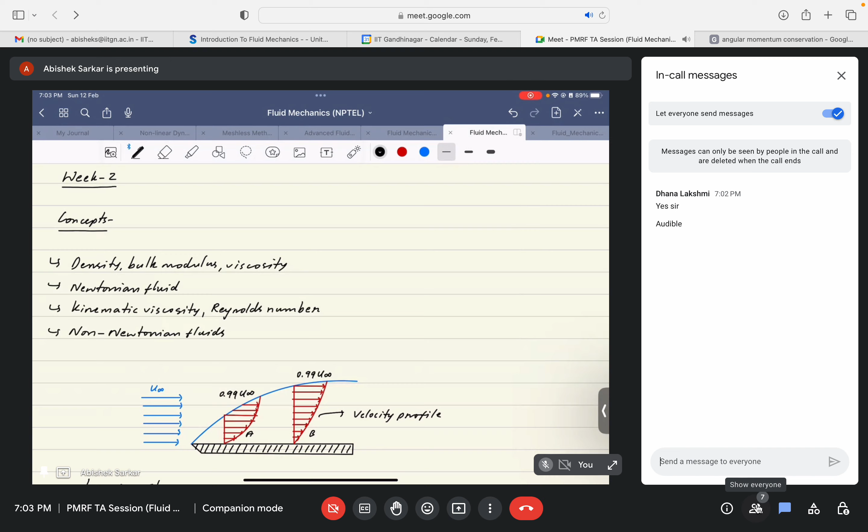So, based on the content of the course that I have seen, I guess these are the topics that have been taught: density, bulk modulus, viscosity, then Newtonian fluid, kinematic viscosity, and also non-Newtonian fluids. So, among all of you, do you have any doubts regarding these concepts? You can ask if you have any doubt. So you're free to ask.

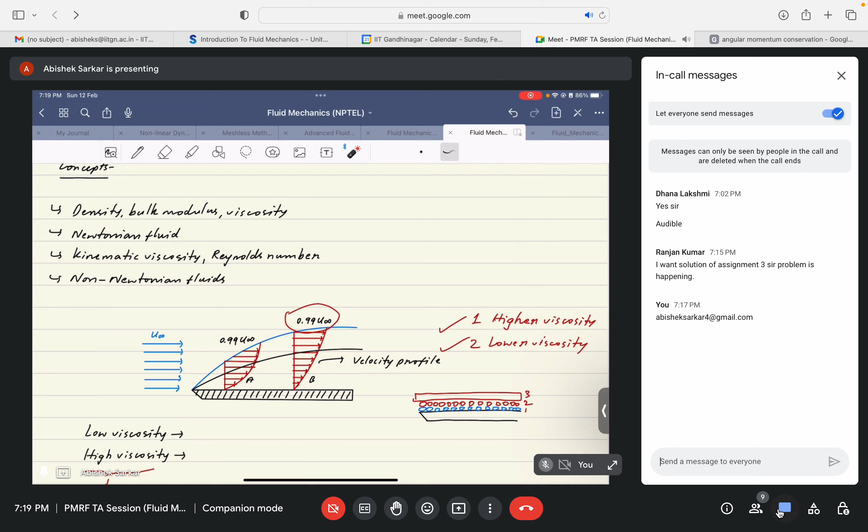I guess Professor Chakraborty took a long time to teach you the concept of how to choose the elemental volume. What are the conditions to choose the elemental volume to find out density? What is the concept behind choosing the elemental volume? The volume shouldn't be too small or too big. Yeah, absolutely right. Who is it?

Prasam. Oh yeah, Prasam, welcome back again. You're absolutely right. Why do you say that it shouldn't be too small? Because it may seem from a mathematical point of view that as the limit approaches 0, we get more accurate or fine solutions. But as you have pointed out correctly, we cannot choose it to be too small. Could you please explain to the class why it cannot be too small?

Because the error will be more, sir, if we apply the law of continuum mechanics. Yes, you're absolutely right. It's actually the continuum hypothesis. If the elemental volume is much lower compared to the mean free path of the fluid, there will be much more errors, much more oscillation, because there will be very few particles within the chosen volume, and that will not give a correct value of the density.

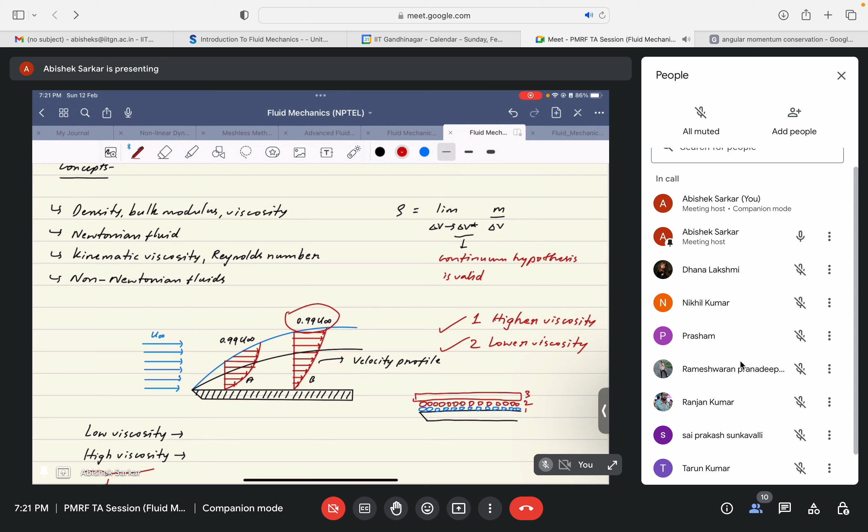Thank you, Prasam. So density is clear. I'll point it out again. Density can be given as the limit of delta V tending to delta V star of mass per unit volume, where delta V star represents the smallest elemental volume over which the continuum hypothesis is valid. If we go below that, the continuum hypothesis does not work, and that's why we get large errors while measuring the density.

So could any one of you tell me about the bulk modulus? What does bulk modulus actually mean, or what is its significance?

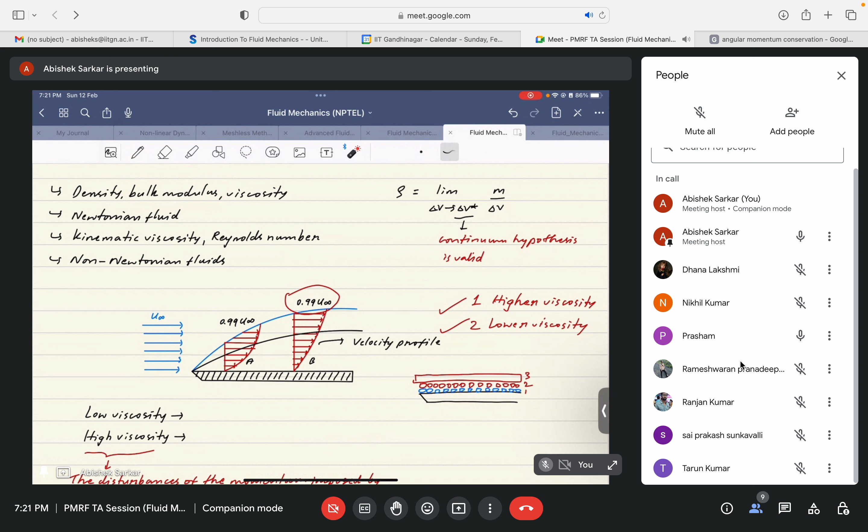Please, a basic mathematical definition is also fine. We'll just then try to understand the definition. So what's bulk modulus? Hello. Yes, Prasam. Sir, it is significant regarding whether the flow is compressible or incompressible. With respect to change in pressure, the relation between change in pressure to change in the volume or density. Yeah, thank you, Prasam.

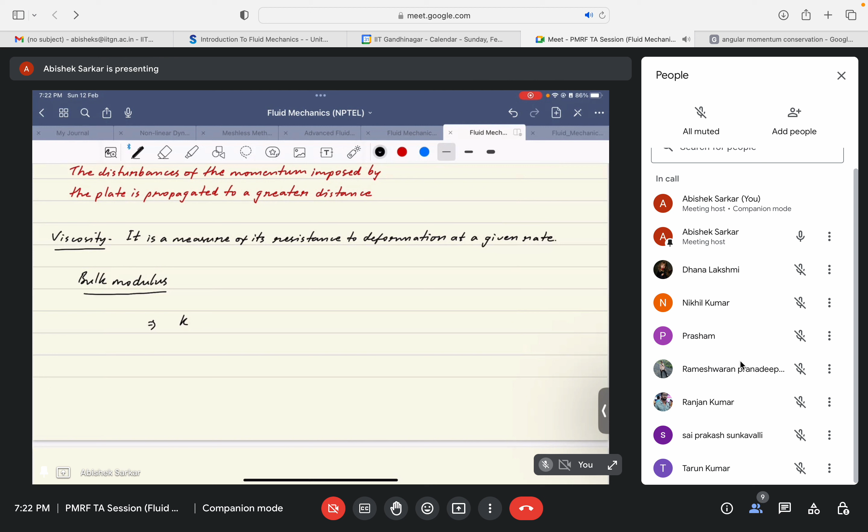It's absolutely correct. So, as he has rightly pointed out, it helps us to know whether the fluid is compressible or not. So the mathematical definition will be given by the change in pressure, applied pressure, divided by the change in volume over its original volume, or in other way, the change in pressure divided by the ratio of the change in density to its original density. So given this definition,

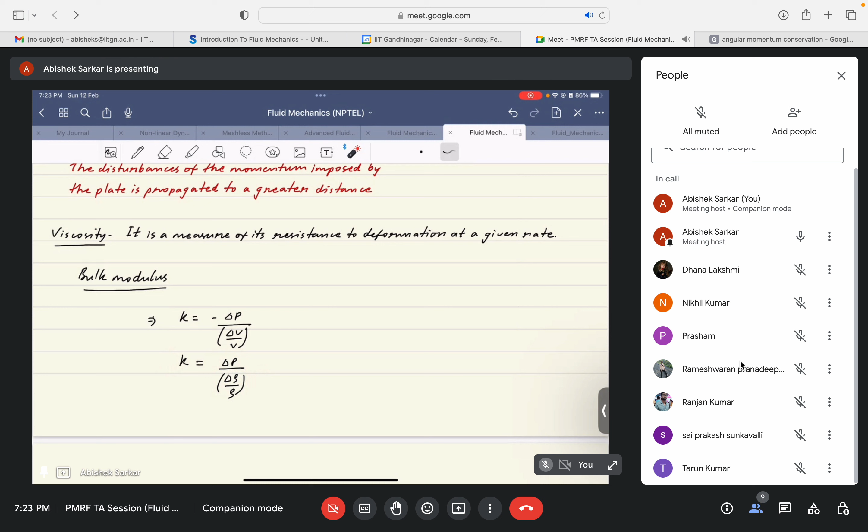as you pointed out that it helps us to know whether fluid is compressible or not, what would be the bulk modulus for a highly compressible fluid? Would it be low or high? Sir, low? Yes, it's correct, because for a given applied pressure and a given density, if the change in density is higher, then since the value in the denominator is larger, the value of K will go down. This is a very subtle concept, but thank you for pointing it out correctly.

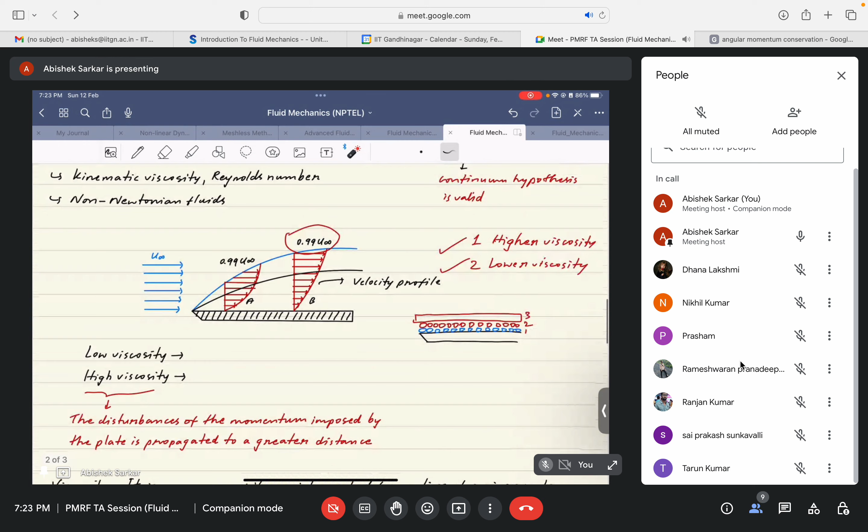Okay. So that's fine. So given you have pointed out compressible or incompressible fluids, can anyone please tell me about the parameter? Not bulk modulus. Bulk modulus is also one of the parameters, but the more famous parameter that we usually choose to differentiate between a compressible and incompressible flow. I guess it's a well-known non-dimensional number. So what is it? Could anyone please point out?

Mach number. Yeah, so thank you, Prasam. It's again correct. So Mach number is the well-known or standard measurement of telling whether a flow is compressible or not, and it's given by the ratio of the fluid velocity to its sonic speed. Sonic speed is basically the speed of sound in that medium, or in a simpler sense, the speed by which the disturbance propagates in that medium. Okay, so I guess it's clear.

Sonic speed, or speed of sound in that medium. That's also necessary. Speed of sound varies from medium to medium, whether it's air or water, so it's not a constant value. Okay, so that's again correct. So now we can, I guess, talk about Newtonian and non-Newtonian fluids.

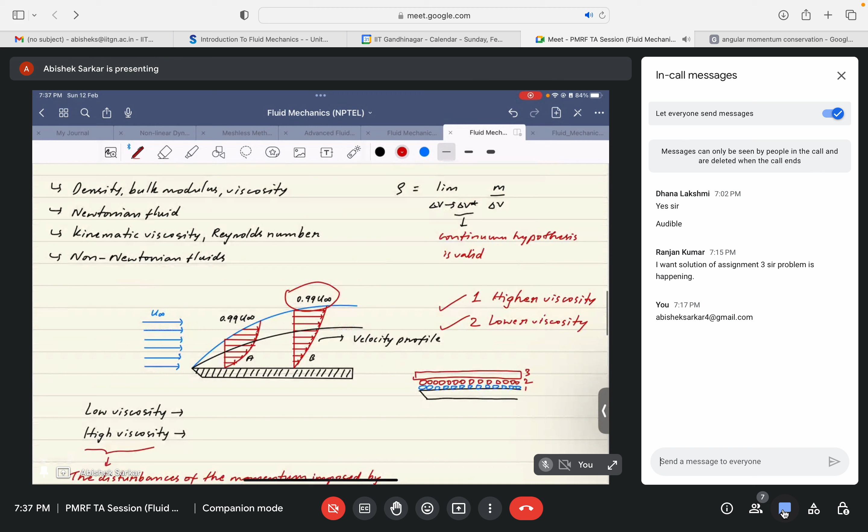That's why we follow these equations and formulate them in our momentum equations, or in this case stress-strain equations, to model our problems. That's the only reason we use them, but these are not universal laws. Okay, that's all I wanted to point out. Anything left? Yeah, kinematic viscosity and Reynolds number. So mu here that I have written is actually dynamic viscosity.

So given this, could anyone please tell me what kinematic viscosity is? Kinematic viscosity. So mu divided by rho. Yeah, thank you so much, Prasham. It's actually given by mu divided by rho. Yeah, so

what does it actually signify? Could you please tell what is the significance of kinematic viscosity? We know there is a dynamic viscosity that tells us about the resistance of the fluid to any motion through it, but why have we made efforts to define another viscosity, or make it more problematic for us by defining another parameter? Why are we defining kinematic viscosity? Could anyone please give just a vague explanation of what it signifies?

Sir, in kinematic viscosity, the mass is not there. I mean, it is not considered. In that unit, the mass is not there, kg is not there. Yeah, that's fine. That's also correct. I will not say 100% correct, but that's a very good approach to explain it in some sense. But in a simpler sense, or in a more accurate sense,

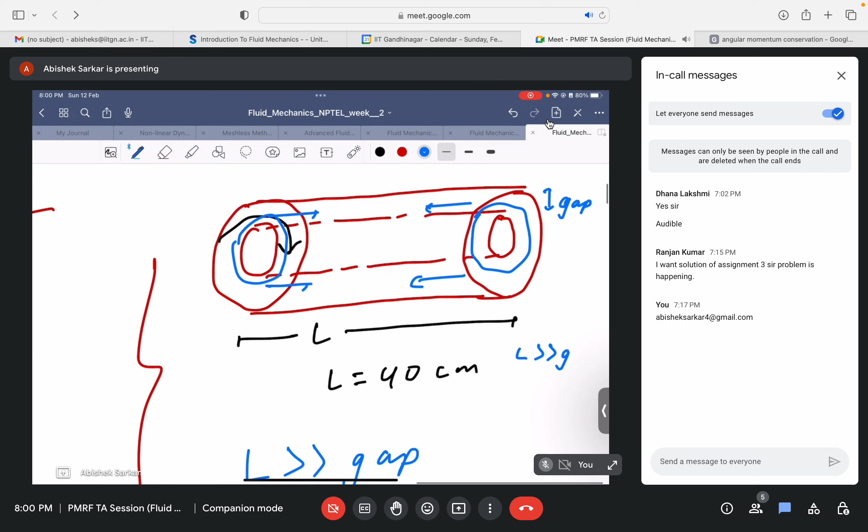So I guess it is clear when we can take these assumptions. It should not always be taken for granted that we can ignore the end effects. Even if in the exam you're told that we're ignoring the end effects, you should mention why. Why not include the end effects?

You can mention that we take the length of the cylinders to be much larger than the gap between the cylinders, and that's why we can comfortably assume that the fluid flow within this region is not affected by what's happening at its ends. Given this assumption, we can solve the fluid flow problem in this region. So I guess it's clear.

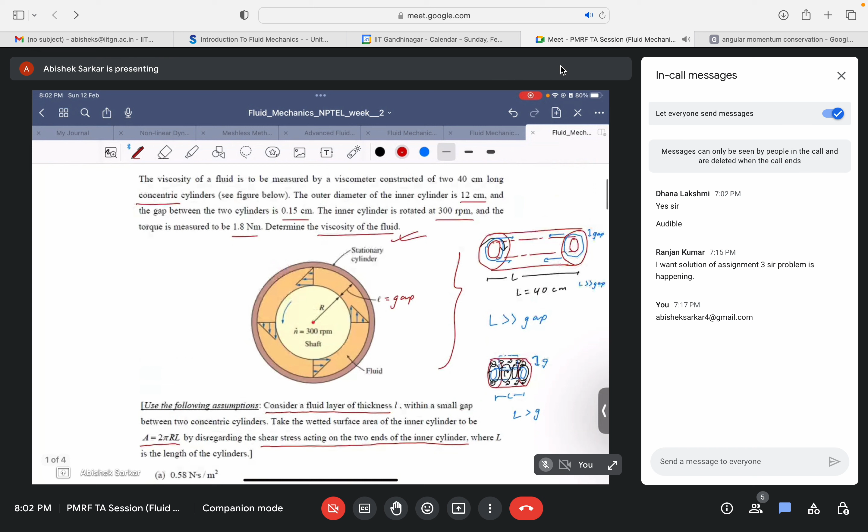So I'll try to solve it here, and draw the diagram again. Has anybody solved it? Sir, option D. Let me see, what is the option? 0.158. Okay, thank you, Prasham, I guess it is right. For the sake of all others, we'll try to solve it, and then take on other problems for others to solve.

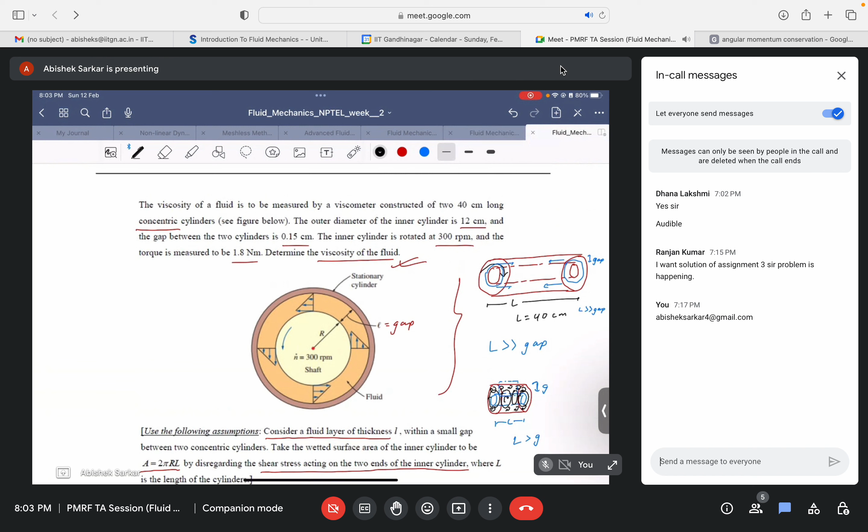So those who have not solved it or do not know how to approach, look at this illustration. Here it is given that the length of the cylinders is 40 centimeters. The outer diameter is not given, so that's fine. The diameter of the inner cylinder is given to be 12 centimeters.

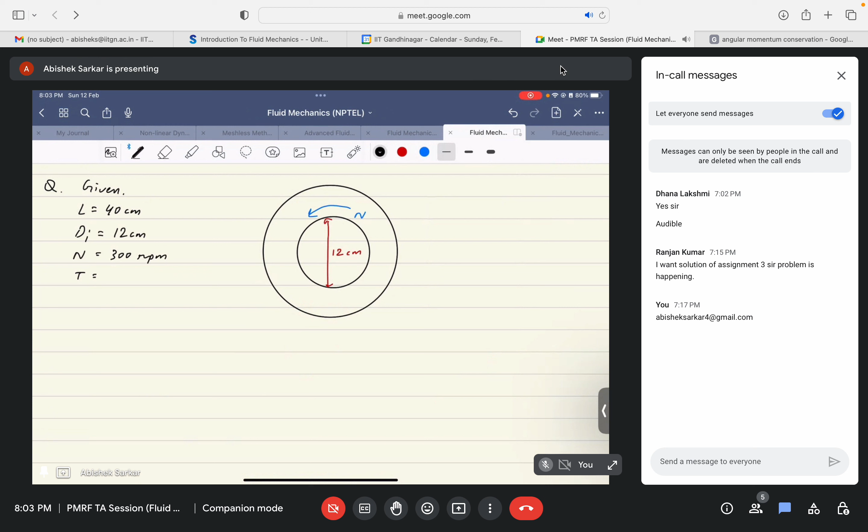The RPM, or the rate at which this inner cylinder rotates, is given to be equal to 300 RPM. RPM is basically revolutions per minute. And the torque, yeah, is anybody speaking? The torque is measured to be 1.8 Newton meter.

Dhana Lakshmi, are you speaking? Is there any doubt? Dhana Lakshmi?

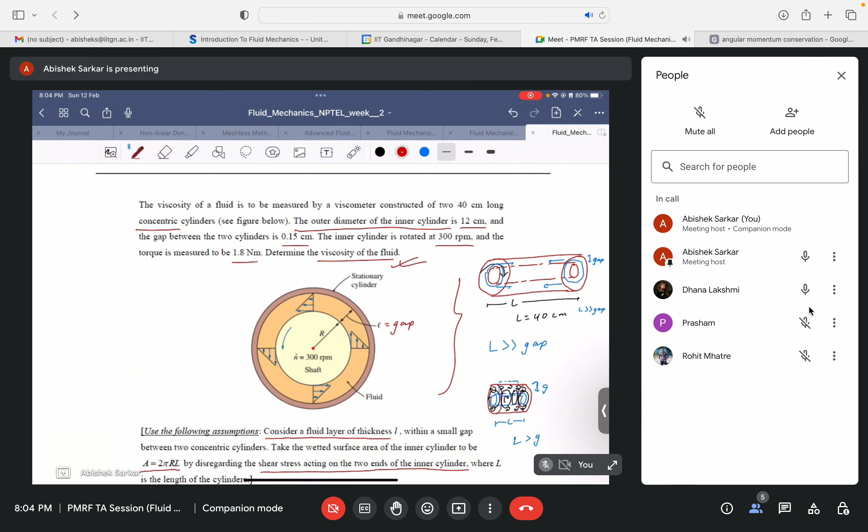So the torque measured is 1.8 Newton meter. So the torque is a very trivial formula. The torque is given by the force applied times the perpendicular distance from the point at which the force is applied. So it is basically the radius of the cylinder. Say if it is the center, then the perpendicular distance at which the force is being applied would be, I'm sorry, it is wrong. Yeah, the perpendicular distance at which the force is being applied is basically the radius of the inner cylinder, so that's fine.

And then again, this force that is required to rotate this cylinder would be given by what? As Prasham has solved it, what would this force be equal to, Prasham? Shear stress into area. Yeah, absolutely correct. Shear stress into the area. And how have you calculated shear stress, could you please tell us? Sir, Newton's law of viscosity. Okay, you're telling tau would be equal to mu du by dy, right? So what is du by dy? Velocity gradient, velocity by the gap.

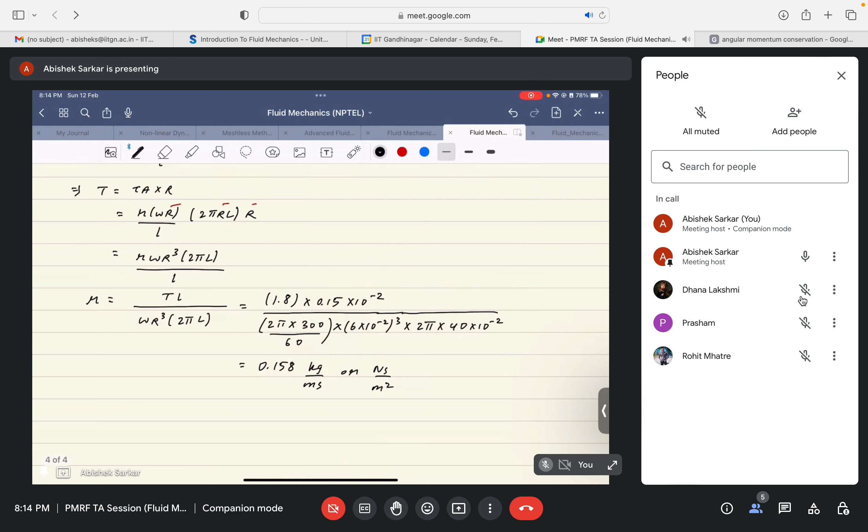And what was the answer? It is 0.158, right? Yes, 0.158. It would be kg per meter second. I guess the units are also right. Or you can write Newton second per meter square. Both are correct. So I guess it is clear now. So let's go on to the next question.

So just mark out the questions. This is question number 1, this is 2, and this will be 3. Consider two identical small glass balls. Again, these are important terms in the question. Identical small glass balls dropped into two identical containers, one filled with water and the other filled with mustard oil. Which ball will reach the bottom of the container first?

It's a very qualitative question, trying to understand the conceptual clarity of the students. It's very easy actually, but whichever option you choose, I need an explanation from you. So please see the options and tell me the answer. It's very easy but very conceptual also.

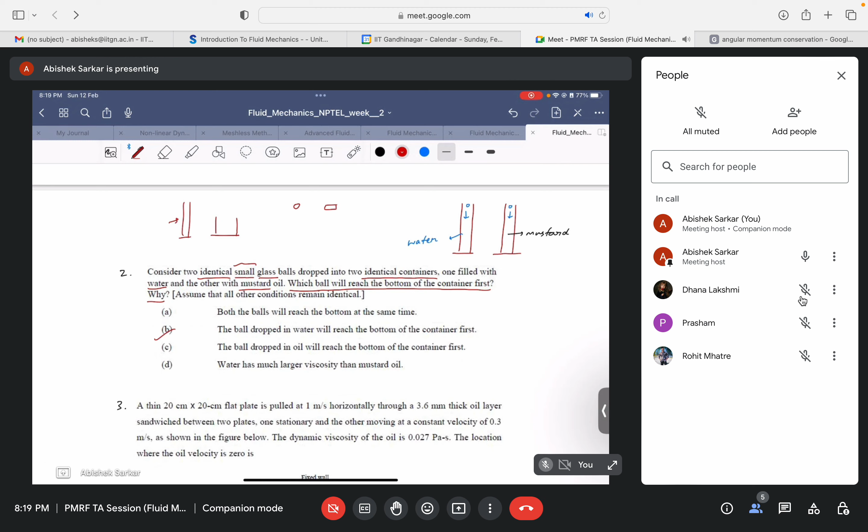You drop three different balls, one may be metallic, one may be glass, one may be plastic, and find out the time it takes to reach the bottom of the container. Have any of you done this experiment? That's fine. I'm just saying because it's a very popular experiment people use to find the viscosity of a given fluid. So I will give you a basic overview just to let you know why the term small is important.

They could have given two bricks dropped in two large containers, one containing mustard oil, one containing water. Why have they specifically mentioned it to be small? Okay, so this contains water and a small glass ball is dropped. So once the ball is within the liquid, what are the forces that act on this glass ball? If I draw a free body diagram of the glass ball, what are the forces that might act on it?

The gravitational force, weight. Then the viscous force. In which direction will it act? This direction or this direction, 1 or 2? So 1, sir. Yeah. Is there anything else? If the ball is accelerating, then... The ball is not accelerating. The point at which I want to balance these forces is a point at which the ball is not accelerating. So what is the other force? The ball is falling in a liquid. What kind of force does a body experience in a liquid? Buoyant force. Yeah, thank you. The buoyant force, FB, then viscous force FV.

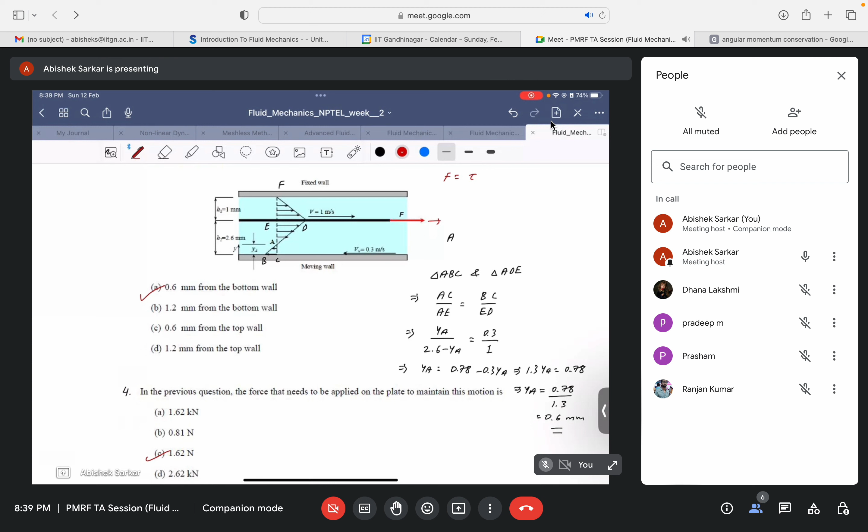So since the plate is being pulled by a force F, it will experience a resistive force because of the viscosity of the fluid. The viscous force, or shear force, is given by shear stress into area. For shear stress, we assume the fluid is Newtonian. It is not strictly given in the question, but if not given, you can assume it to be Newtonian and just mention it.

We assume the fluid is Newtonian and apply Newton's law of viscosity to find the shear stress, and the area is given: 0.2 meter into 0.2 meter. 20 centimeters is the same. Since the plate is moving through the layer, there are two faces at which the plate experiences the shear force, both the upper and the lower surface.

So you need to find F shear upper, or 1 as per your convenience, then F shear lower. Once you find them, add them up: F shear total equals F shear upper plus F shear lower. Then Prasham, since you have solved it, can you tell me how you have taken the velocity profile to be?

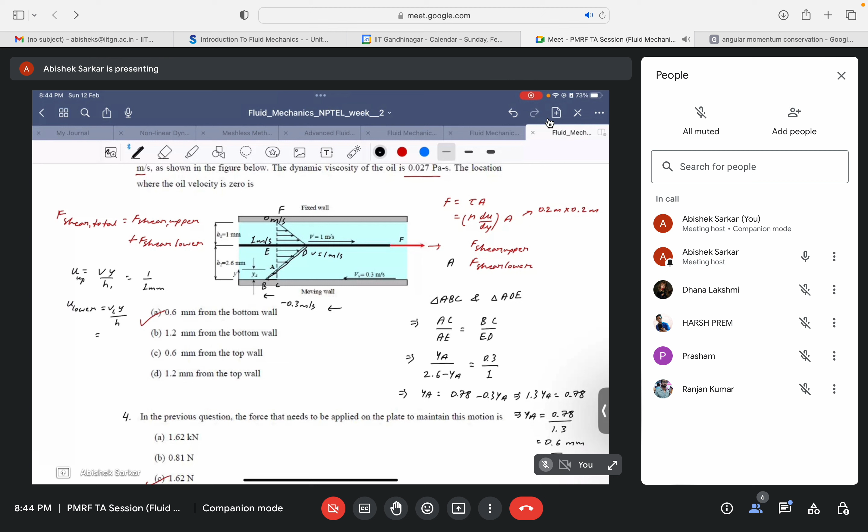Yes, sir. So since it varies linearly, if we take a derivative, the y will get cancelled out, so for the lower part, tau shear lower would be equal to mu VL by H. And for finding this VL, you need to take into consideration the net change that the velocity profile has gone through from the lower plate to the upper plate that is being pulled. So that would be equal to mu 1 minus minus 0.3 by 2.6.

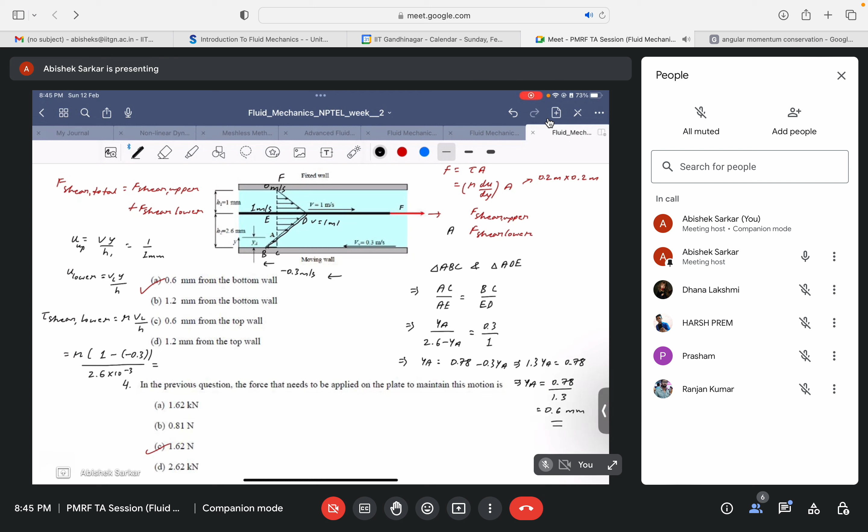So if you do it by this, does it come out to be different? Same, sir. Then how could it be same if you're not including the effect of 0.3 meter per second? Okay, that's fine. You may just check it, or I will also check it again and clarify in the next class. But you need to take it like this, okay? Okay, sir. Thank you.

Again, it's a very simple question, only dimensional analysis. So please tell me as fast as you can. Question number 5. What are the dimensions of kinematic and dynamic viscosity? B, sir. B. Yes, absolutely correct.

Kinematic viscosity unit is meter square per second. So its dimension would be L square by time, that is L square T inverse, right? And for dynamic viscosity, it is shear stress by the velocity gradient. Shear stress has the same dimensions as pressure, so it will come out like this.

They both do not have the same physical meaning, okay? Dimensions are same because basically units are same. And the velocity gradient will be meter per second by meter, then you cancel out, and it will be equal to M L minus 1 T minus 1. I guess it is correct. Thank you Prasham and whoever else, I couldn't see your name, that's fine, thank you.

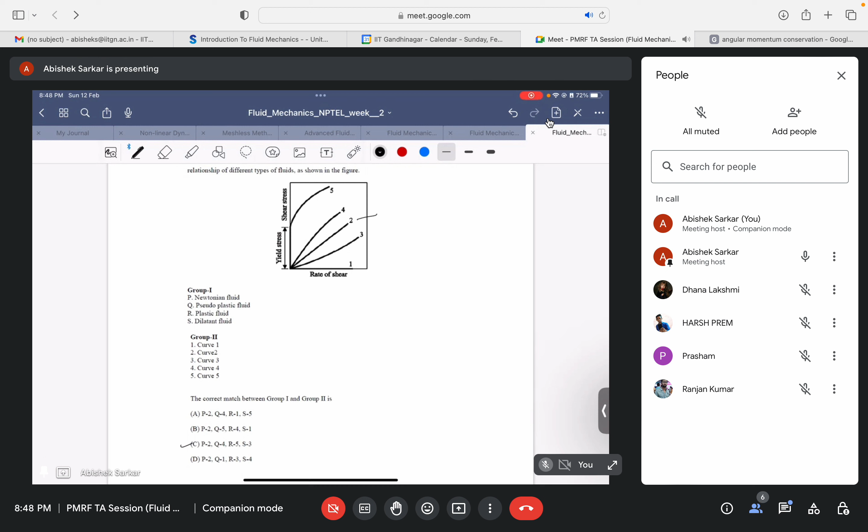Okay, question number 6, again very simple. It's match the following. Seeing these different types of fluids, just tell me the right option. Take your time. C, sir. Okay, good. I will write again. P is 2, Newtonian. Q is 4, Q is pseudo plastic.

Oh, I guess you have taken the lectures very seriously. You are very fast now replying. Thank you everyone. R is 5. R is plastic fluid. Then S is 3. Dilatant fluid. Okay.

Okay, any examples for each of them? Dilatant fluid, any example? So starch solution, is it dilatant? Starch. I actually don't know, but if it is, then very good. Starch, just right. I don't know. Okay, I also don't know. Sir, plastic fluid. Yeah, example. What is it? Do you know? Tell me. Plastic fluid. What is the example?